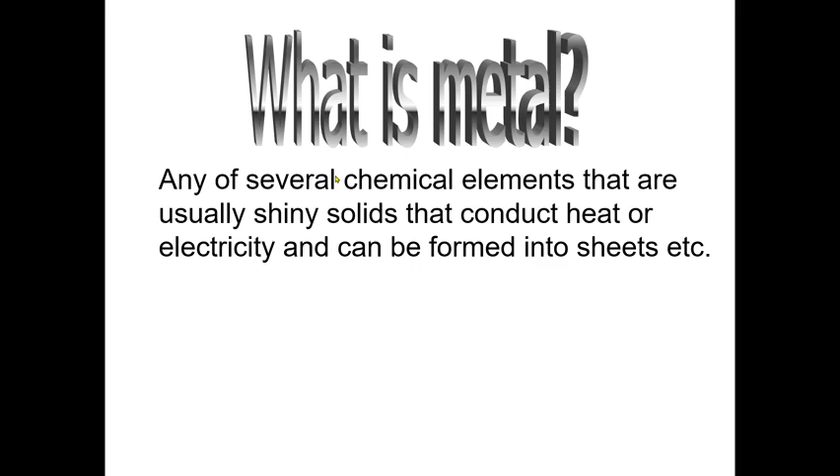Where do we use metal? Think about that. Well, quite possibly in every industry on the planet. I was challenged once, what about basket weaving? Well, most likely the tools that they use to cut down the plant materials to make the baskets are metal, and there's probably some other tools that they use which are metal. So it would be really hard to think of an industry that metal is not used.

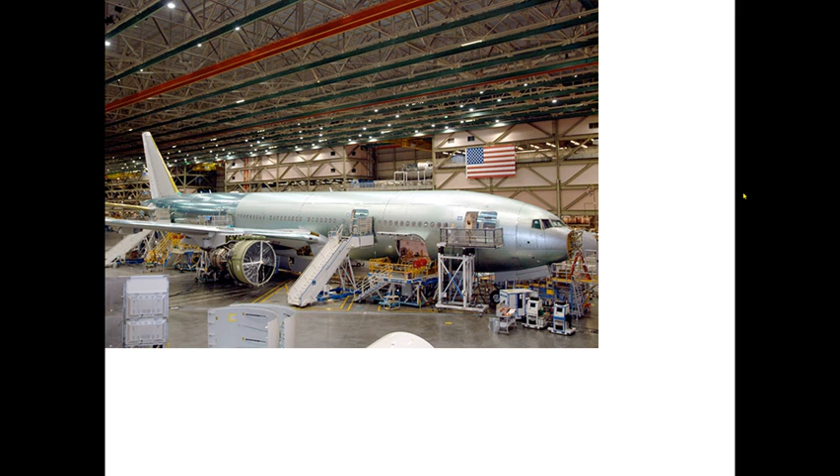Here is the aircraft or transportation industry. And this is aircraft aluminum, and aircraft aluminum is a mixture of aluminum and copper and a few other elements, which we'll discuss as we go on. The reason for aircraft aluminum is it's very strong and lightweight.

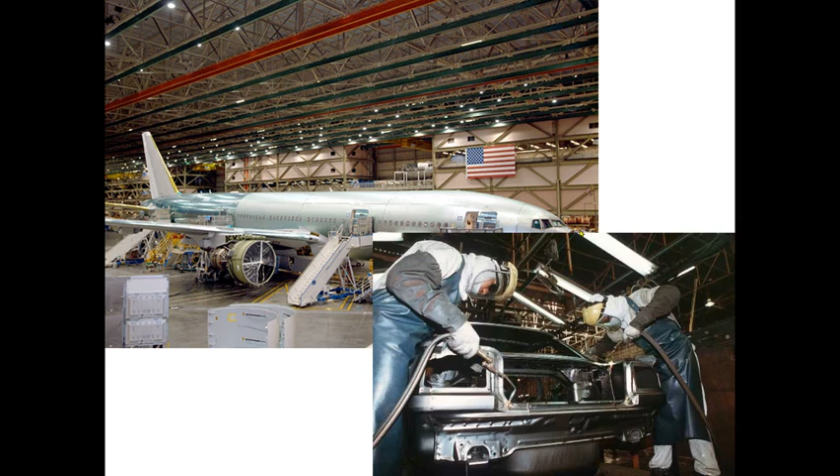Also in the transportation or the automobile industry, every car, I shouldn't say every car because I have seen some novelty wooden cars, but every car on the road that is manufactured has a lot of metal in it. Most of them, the body and the chassis are made out of steel. There are some high-speed racing cars or custom cars that have titanium bodies and maybe carbon fiber bodies, which is not a metal, but most of the structure of cars is made out of metal, usually steel.

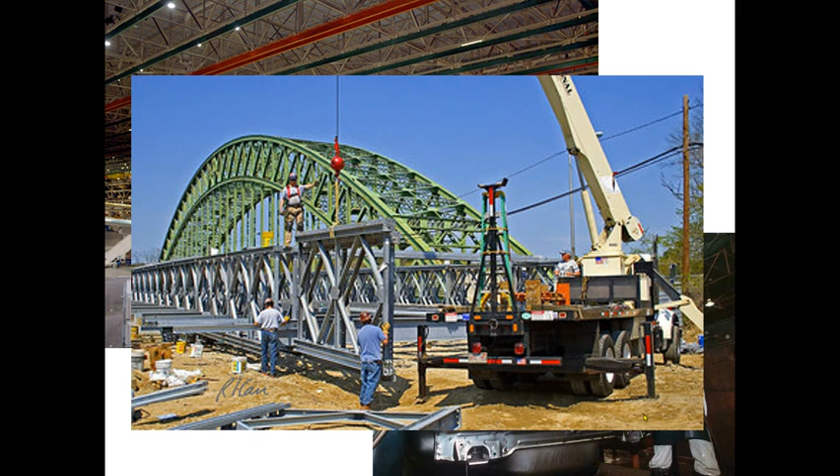Same with bridges and the civil engineering area. Bridges and construction use a lot of steel. Steel, I like to say, made America, and I'm not the first one to say that. Life would be completely different if we didn't have steel to make structures such as bridges.

Underneath the floor I'm standing on is concrete, and inside that concrete is steel reinforcement known as rebar. The window frames around the windows here at school have metal, and it's used in all sorts of areas of construction, not excluding nails and screws, which are made out of metal.

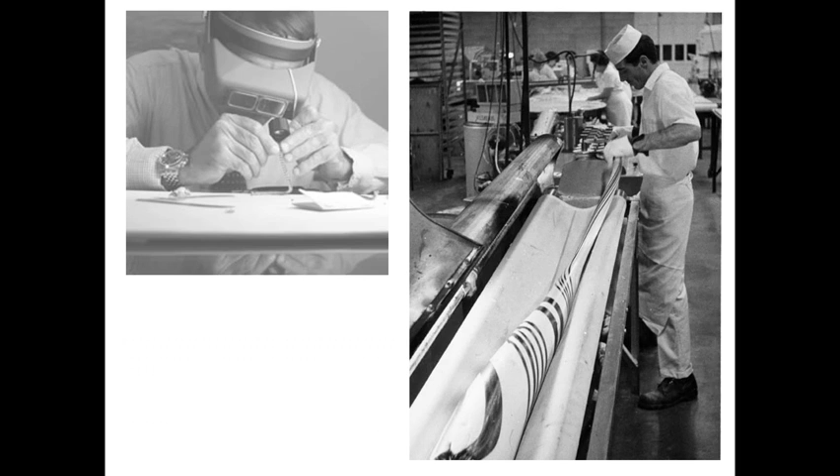On the left is precious metals, which is a jeweler. There are precious metals such as gold, silver, platinum, and really the most expensive part usually is the stone. If it's a diamond ring or a ruby necklace, we trust that metal to hold that stone in place, even though metals such as gold are very, very valuable and range around $1,500 an ounce for gold.

On the right is a candy factory, and it's kind of tough to see, but the food industry relies heavily on stainless steel. That's a type of steel that is non-corrosive and is easily cleaned and sanitized for making food. You may even have pots and pans in your kitchen or silverware that are stainless steel. If there isn't metal in it, metal is used to make it.

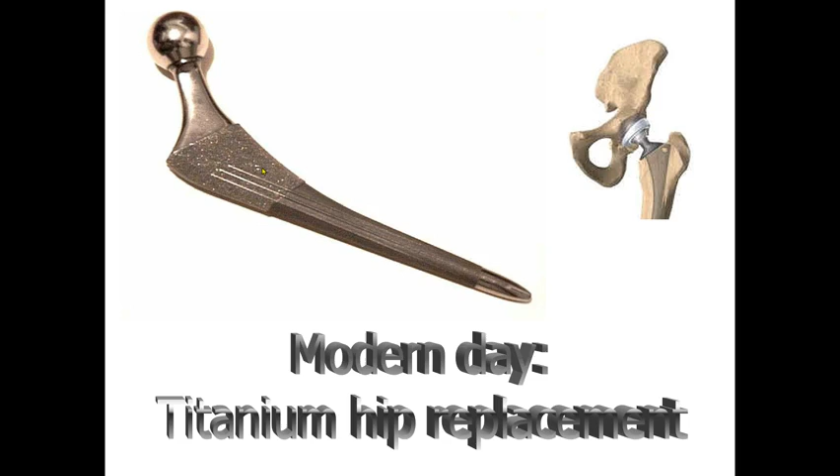Here is titanium and stainless steel to construct a replacement hip joint. This long part of the replacement hip gets literally hammered into the femur, and this being titanium is hypoallergenic, which means it does not react to the body. The stainless steel is non-corrosive and doesn't wear easily, so it is actually part of the joint. So this is a mixture of two different types of metal to replace hips.

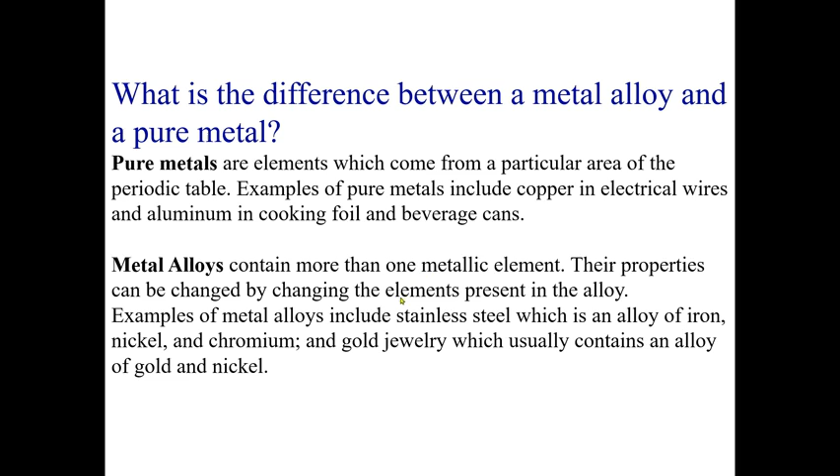So today we are still solving problems and figuring out ways to mix different metals from the periodic table to come up with new metals. And when we figure it out and do the calculation, there are thousands and thousands of metals.

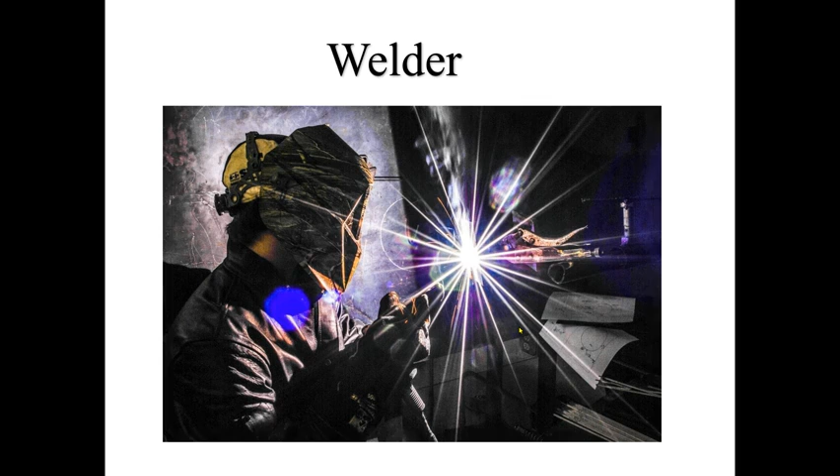What jobs deal with metal? Can you name any? I'm sure you can. Well, it's easy to think of welders. Welding is a very good occupation, requires a lot of hard work, steady hands, and lots of concentration. Some good training and getting some certification goes along with becoming a welder.

Welding happens underwater, welding happens on skyscrapers, welding happens on our oil and gas lines, welding happens on automobiles, and many, many, many other products.

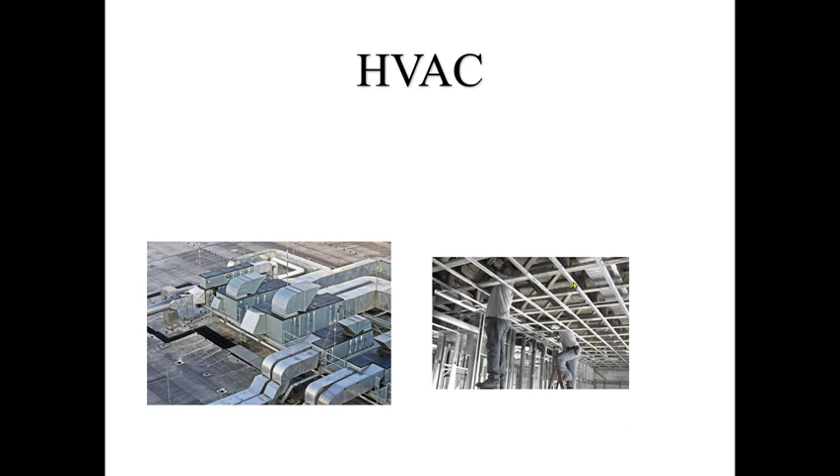HVAC, which stands for heating, ventilation, and air conditioning, is a very common form of metalworking. In your house or your apartment or your place of residence, there is metal ductwork that pushes air, or I should say allows air to travel through to different rooms and different spaces.

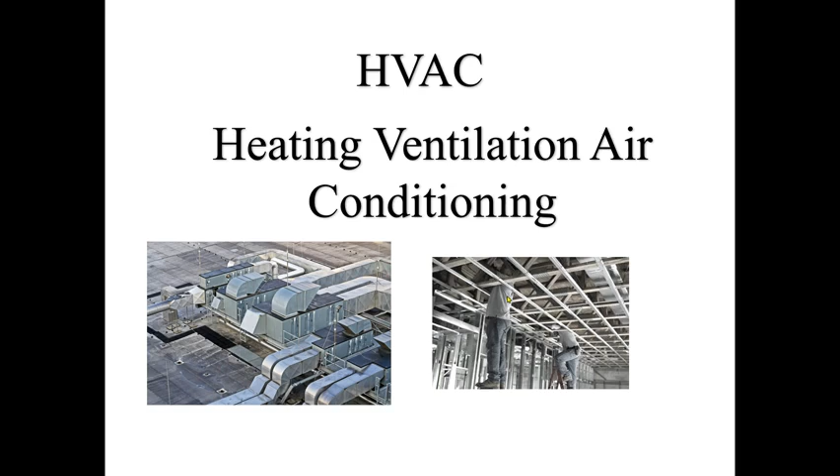So your furnace or your air conditioner is pushing that air through ductwork, and that is a skilled trade all of its own. You could easily become a professional heating, ventilation, and air conditioning installer and do that as a lifelong career.

Manufacturing, without question, uses lots of metal, all the way from the automobiles to the machines that do packaging or bottles to cutting out parts. This here is either a laser or a plasma torch, and here in our shop we have a plasma torch that will cut through metal, very similar to the way this one does.

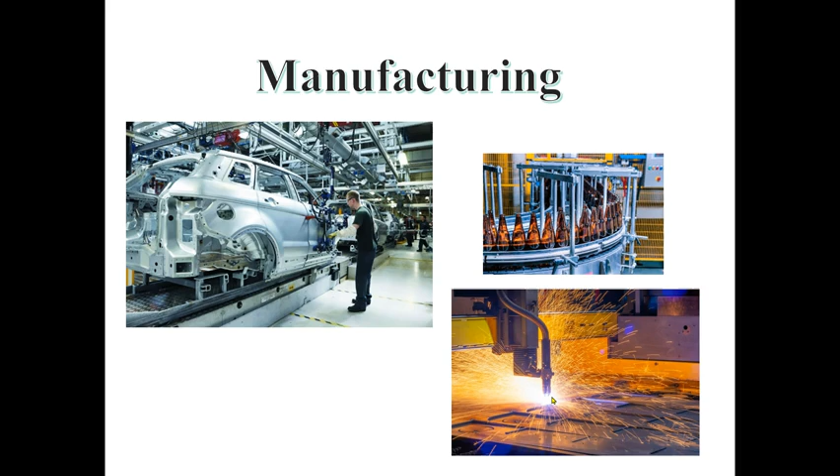Machinists are metal workers. In fact, look around your room or the space you are in right now and look at nearly any plastic object. I say nearly, and my guess would be over 99% of plastic objects are the result of a machinist that makes molds. And the mold is made out of steel usually, and with a steel mold, you can get in the neighborhood of 1 million plastic parts from that mold.

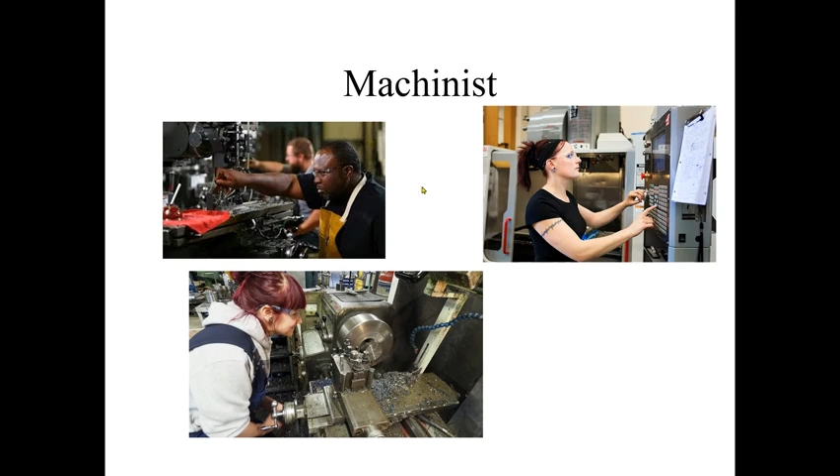If we made the mold a little lighter and easier to machine out of aluminum, an aluminum mold could get 100,000 plus or minus plastic parts. So the benefit from making a mold is once that mold is made, it is very rapid and very cost effective to inject plastic and make plastic parts because of the machinist or the tool maker who makes the metal mold.

Foundry is where metal is melted and poured into molds. Many things are done this way. Engine blocks and fire hydrants are a good example. If you have seen a fire hydrant, the surface looks a little bit rough and it's painted. So that is going to be a cast iron fire hydrant, and it's painted because it will rust if it's not painted. And then the parts that have threads for the caps and the screw fittings are machined after the fire hydrant, or for that matter, engine block, are poured.

There are many objects. Lots of the tools we have in our shop, including anvils and our milling machine bases, are poured from liquid steel in a foundry. Side note, that steel that is being poured there is close to 3,000 degrees Fahrenheit.

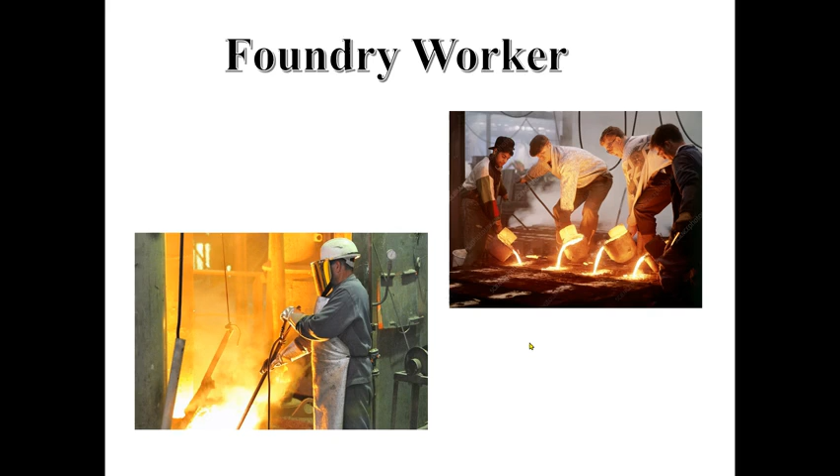Yet another occupation that uses metal is a surgeon. Surgeons will tell you that the experience you gain in a metal shop directly applies to the skills that they use performing surgery. They have to drill holes and use hammers and insert screws and read drawings such as this. In this case, a drawing may be an MRI or an X-ray, but they need the ability to understand what that three-dimensional space is like and know how to repair it.

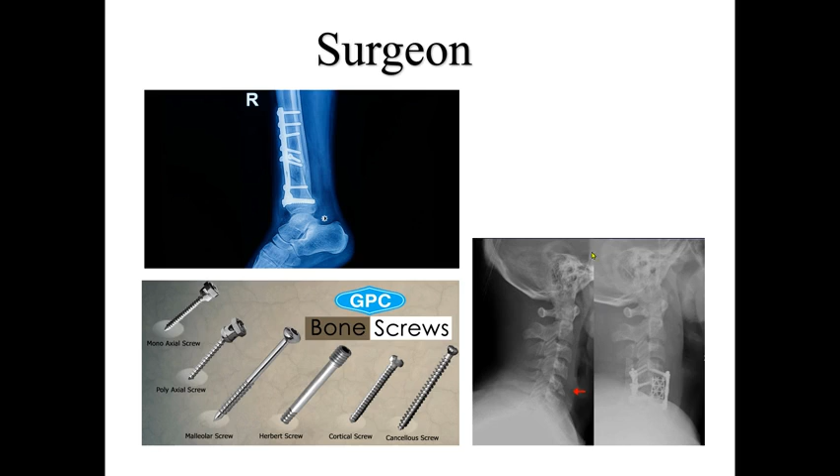Yes, a lot of education goes into being a surgeon, but you would certainly benefit by having experience in a metal shop if you are bound to be a surgeon someday.

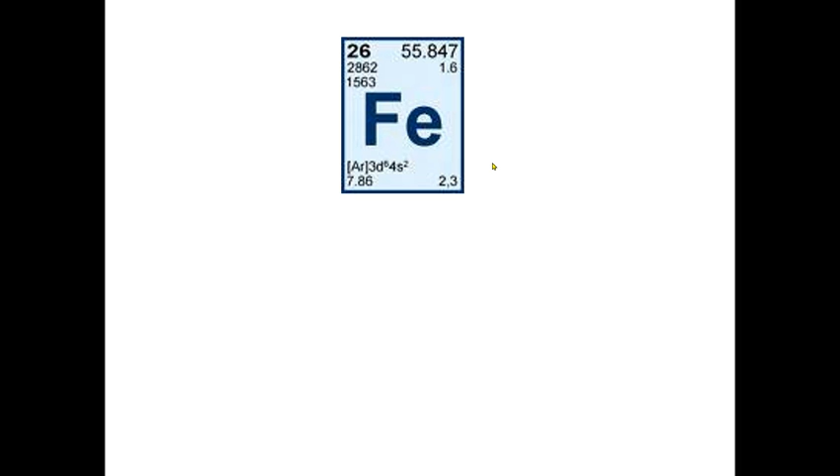Here we're starting to talk about the different types of metal specifically, and this is the periodic element iron, and Fe stands for ferrous. Ferrous means iron. Ferrous, not this guy. Metals which contain iron are ferrous. Ferrous is, I use the word backbone, but the ingredient in many different types of metals.

Metal or iron out of the ground is useful, but not nearly as useful as once it is mixed with other elements. Not this guy. Ferrous.

Cast iron has a white, grainy appearance when broken and can be very hard. White cast iron has a white appearance when broken. Kind of did those in reverse order. When white cast iron is broken, it has a white grainy appearance, and gray has a gray grainy appearance.

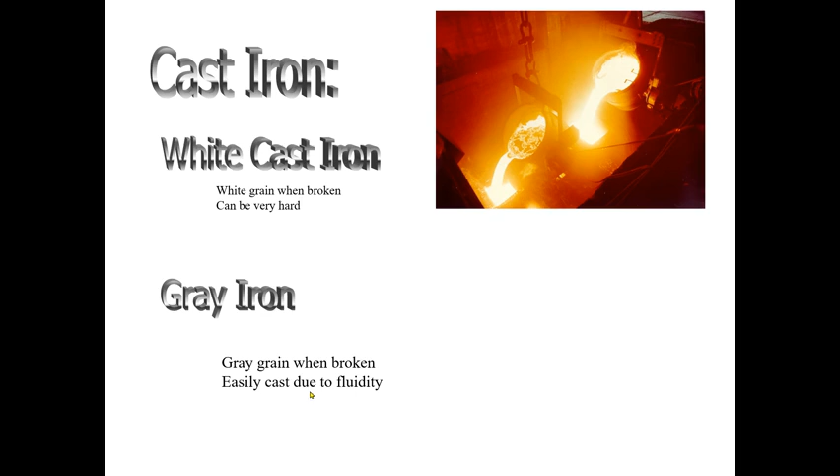White cast iron can be very hard and is used for making parts in machines such as pumps or engines that have a lot of wear, meaning there's a lot of contact with other surfaces and they might wear out quickly. Gray cast iron is easily cast. It's very fluid. As I mentioned earlier, fire hydrants are gray iron or gray cast iron.

Wrought iron might be the closest iron that we use on a common basis that is most like the iron from the earth that we extract. It's very inexpensive. It's very workable, and you see it often in things like decorative gating and whatnot.

Steel built America. Steel is not only iron, but a mixture of other elements. The steelmaking process is quite complicated, and it took quite a long time for us to figure out how to do it in a mass production method. In the past, the Japanese samurai sword makers figured this out thousands of years ago, but it's a slow, time-consuming process. All steel is ferrous. All steel contains iron.

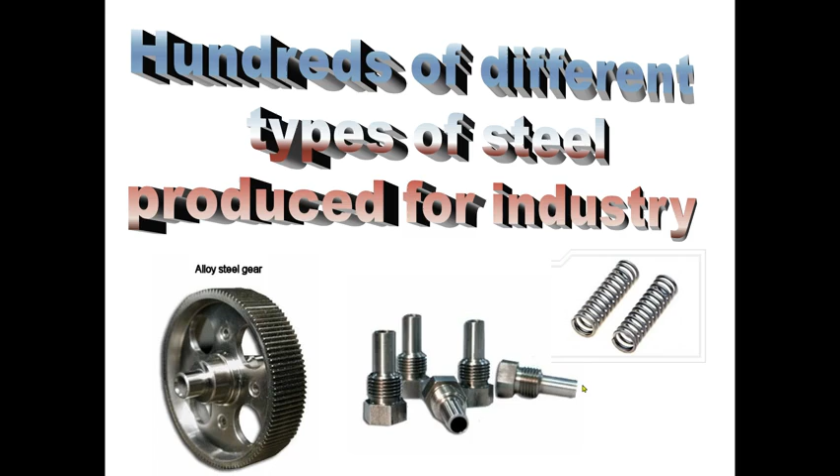A key part here is steel is between 0.05 and 2% carbon. The trick to that is in a Bessemer furnace or other methods, we take the iron and burn out all of the carbon, just get exactly pure iron, and then add exactly the amount of carbon that we want.

So low carbon steel, known as mild steel, which we will use in abundance in our shop, you may be familiar with that sound, contains from 0.1 to 0.3% carbon, and is produced in a Bessemer or open hearth electric process. These steels work easily, can be welded, and come in all different shapes. We get quite a bit of this through our shop, mostly because it's easy to work

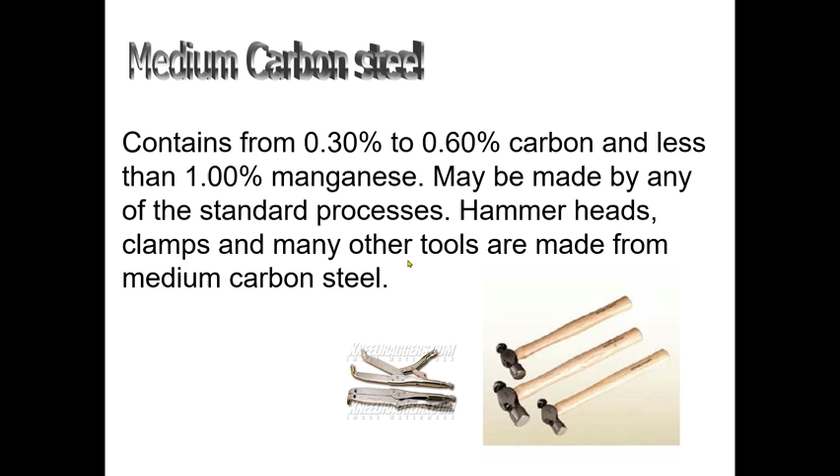and inexpensive. Medium carbon steel you'd find in tools such as pliers or hammers that are a little more expensive than low carbon steel, but contain 0.3 to 0.6% carbon. They're a little tougher. They will withstand the abuse that tools take more than low carbon steel.

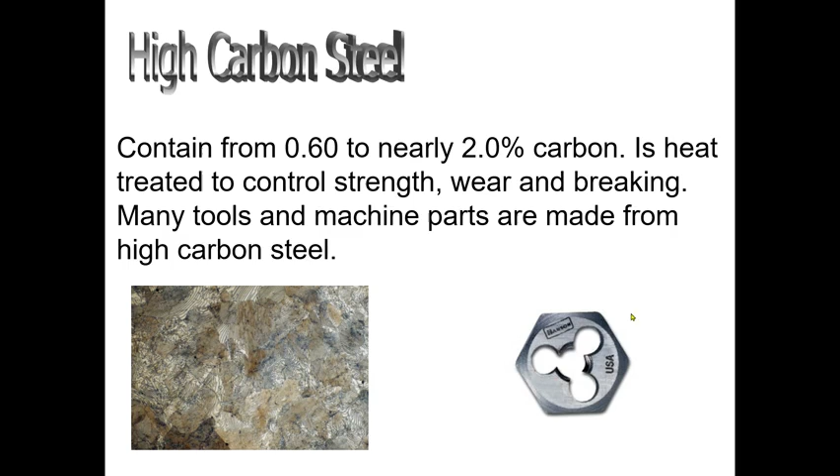And the ultimate here is high carbon steel. High carbon steel can be very expensive, and it has from 0.6 to 2% carbon. There are many levels of high carbon steel used for many, many tools, but when you get to high carbon steel, they quite frequently become steels that will cut other steels. This on the right is a die, which is used to cut threads into rod. So this will cut steel with steel.

A visual comparison: small amount of carbon overall, but just a little difference makes a big difference. High carbon steel is the bomb.

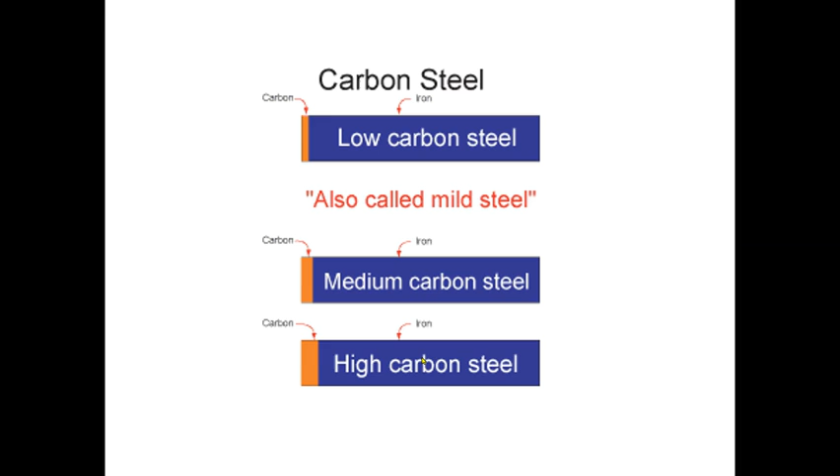Cold rolled gets pushed through in these machines that are extremely strong and powerful because it's not hot, and it work hardens the metal or the steel. If you've ever taken a piece of steel and bent it and then tried to bend it back, it's actually harder to bend it back than it was to bend it in the first place.

That's called work hardening. Same with blacksmiths who hammer on metal and jewelers who work with metal. The metal gets hard and more difficult to work the more it is worked. Cold rolling is the process.

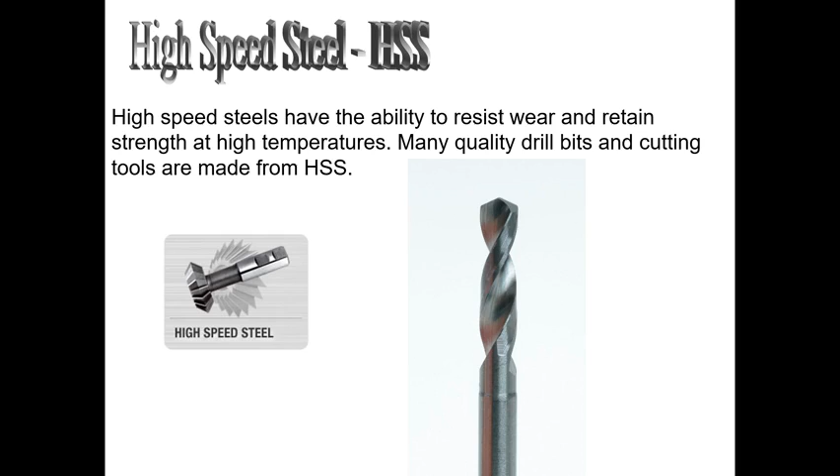Well, we need our tools to stay sharp at those high temperatures when it's getting hot. We certainly like to use fluids, cutting fluids or oils to... There we go. High-speed steels. Spring steels.

The process of making spring steel is really interesting. It is a heat treating process. So once... different springs are made differently, they may be heated up for a certain amount of time, we'll just say an hour, and then dipped in an oil, and then heated up again and dipped in water.

Every spring manufacturer has their own secrets on how to get the springs that will return to their springiness every time. So millions of times a spring will not lose its springiness. However, if that spring is heated up to a high temperature and then allowed to cool, all the springiness is gone.

That brings up a really interesting point about the whole process of manufacturing steel, that there are many ingredients on the periodic table that get mixed with iron to create a steel that suits the needs of the application it is to be used for.

So, for instance, stainless steel is very corrosion resistant, and it has a high percentage of chromium. These are highly resistant to acids, to even simply water and rusting, which is called oxidation. Stainless steels can be very expensive.

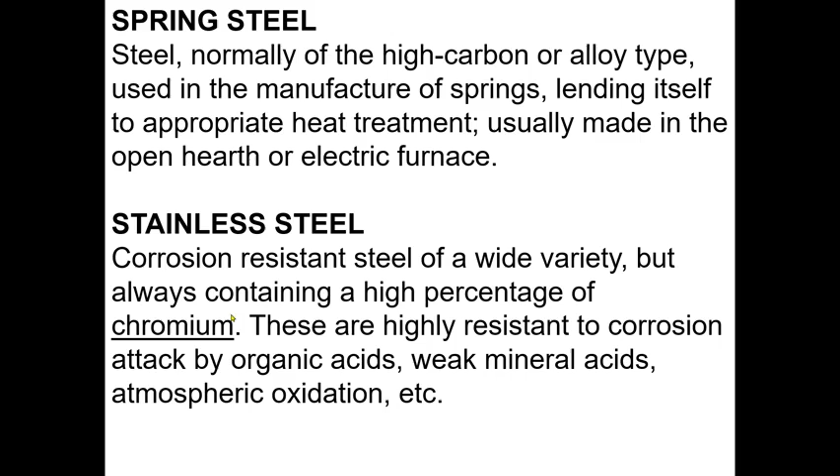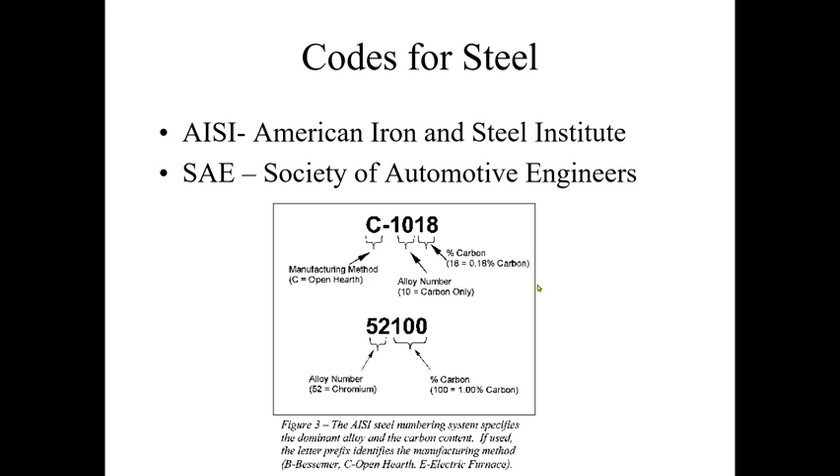It's a reason why we in the United States have very good quality products, because we hold ourselves to a high standard and we know what steel is being used, and in certain applications it cannot be a low quality steel for that application.

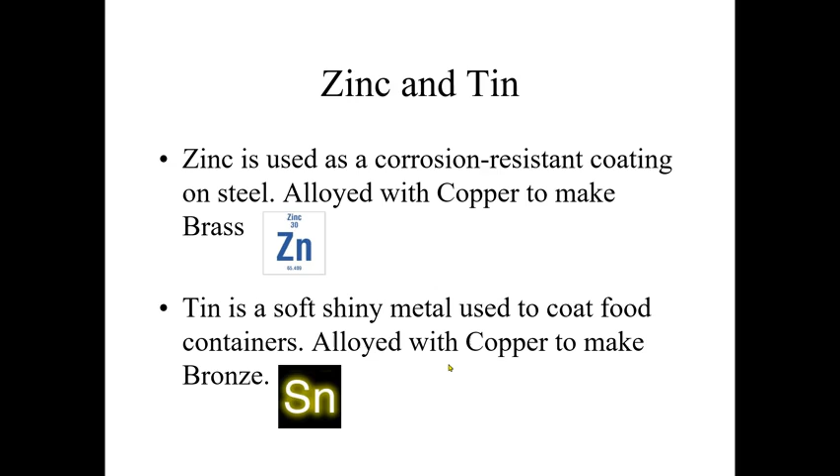Tin is a soft, shiny metal used in food containers, and mixed with copper makes bronze. Pewter, I wish I could hand you a piece of pewter right now because it simply feels soft. It's not soft to the point that you can squeeze it like a marshmallow, but it has kind of a soft sensation to the touch. It's used in small sculptures and kitchen utensils.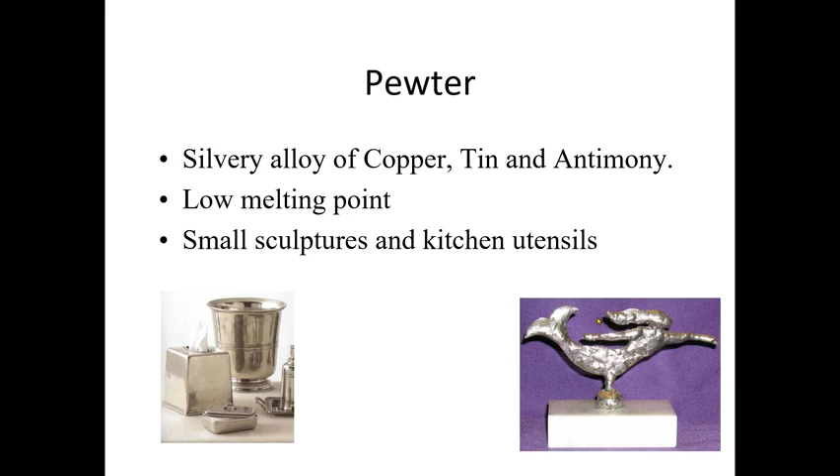The nice thing about pewter is it has a very low melting point, so it's been around a long time where people are able to make castings with pewter because of its low temperature.

Titanium is incredibly durable, strong, and fantastic for its strength-to-weight ratio. Many things are made of titanium, such as eyeglasses and racing components for cars, airplanes, bicycles, and anything that might have metal components on it. It is as strong as steel and as light as aluminum.

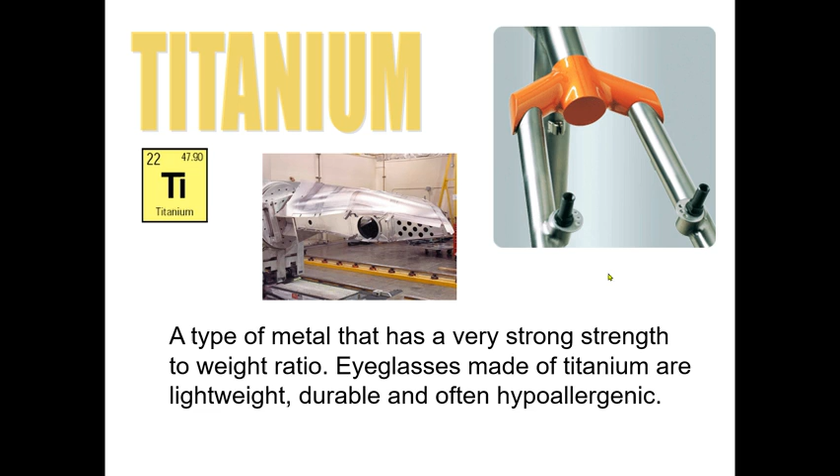An interesting story about titanium is that the SR-71 Blackbird is made from titanium, and it was designed and built to spy on Russia back in the Cold War. Well, most of the world's titanium exists in Russia, so we were getting our titanium from Russia and building SR-71 Blackbirds to spy on them.

Aluminum, to us, seems like: is it worth it to throw it away, or do I walk an extra 3 steps to the recycle bin? Well, aluminum has not always been that way. It is one of the most abundant metals on the planet, and when it's mixed with things like copper, silicon, and manganese, it becomes very, very strong, such as the aircraft and structural alloys we've talked about.

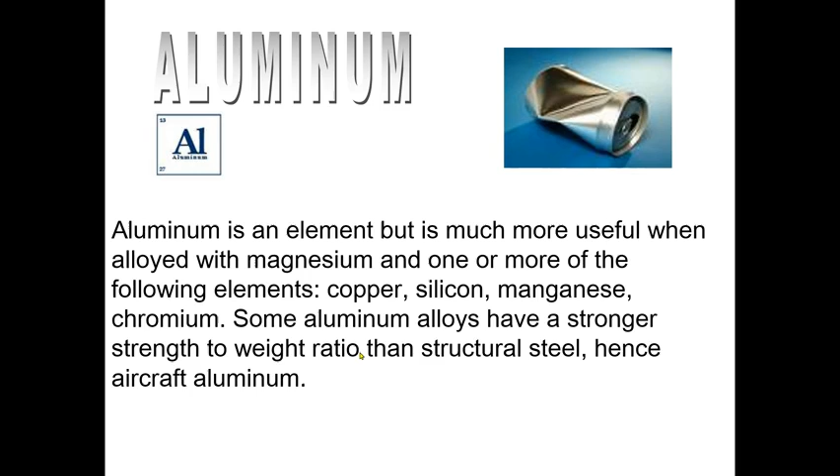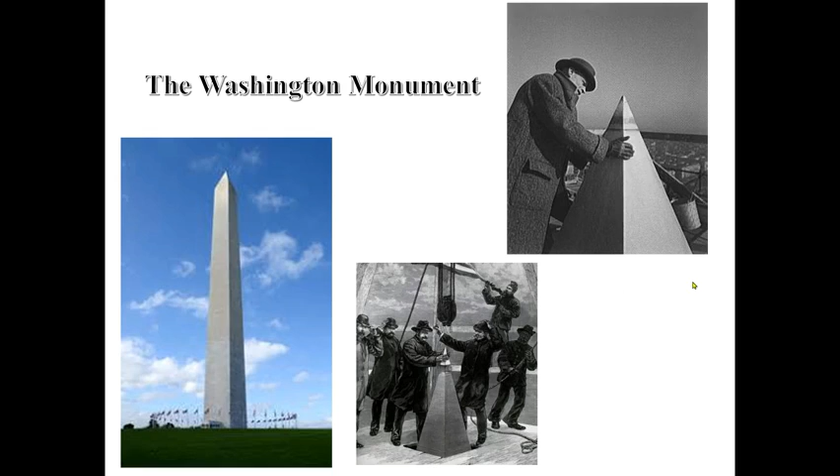Not all that long ago, aluminum was very hard to extract from the earth. So back when they built the Washington Monument, they wanted to cap it with the most valuable metal on the planet at that time, and at that time, it was aluminum. So to this day, the top of the Washington Monument is capped with aluminum, and I'm sure that value has dropped dramatically. It all goes back to the company Alcoa, Aluminum Company of America, that figured out how to take essentially dirt and extract the aluminum from the earth at a cheap cost. Before then, it was very valuable.

Here are 2 interesting ones, tungsten and tungsten carbide. Tungsten is mixed with steel to make tools very hard. Tungsten is an element. Tungsten carbide is an alloy, a mixture of more than just tungsten. And this is one of the hardest materials, the hardest man-made material, almost as hard as diamonds.

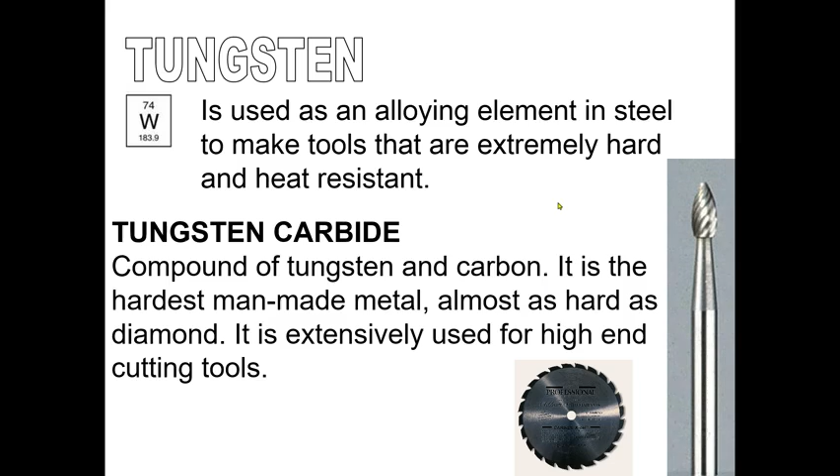Tungsten itself and tungsten carbide are used on tools, and the tips of these saw blades and this little cutter can be tungsten, and they withstand lots and lots of heat and abuse, and can cut through things such as metal.

A very common use for tungsten, which we're seeing less and less of these days, is the light bulb. The glowing element in this light bulb is a thin wire of tungsten, and what happens is we pass electrical current through both sides of that wire, and it heats up so hot that it glows. It's in a vacuum, hence the glass bulb, and because of that metal being so hot and glowing, it produces light.

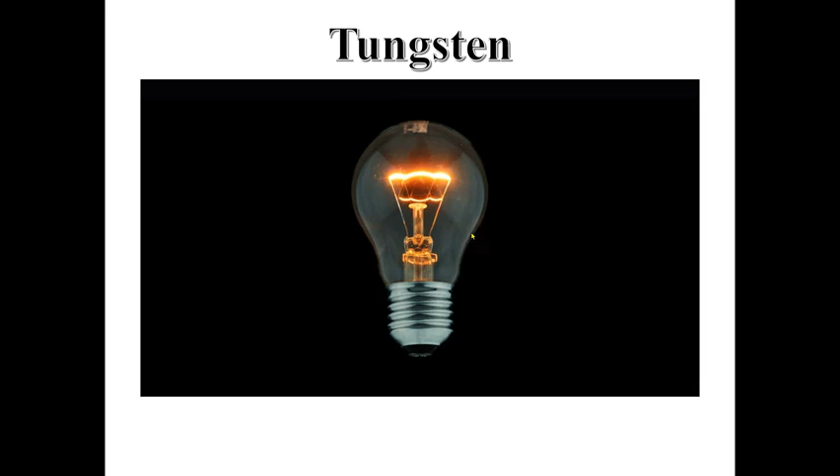Until recently, that was one of the main methods of lighting homes, but we have come up with other things such as compact fluorescent light bulbs and LEDs. However, this little piece of metal in there is tungsten, and it has a very, very high melting point, hence why it was used in light bulbs.

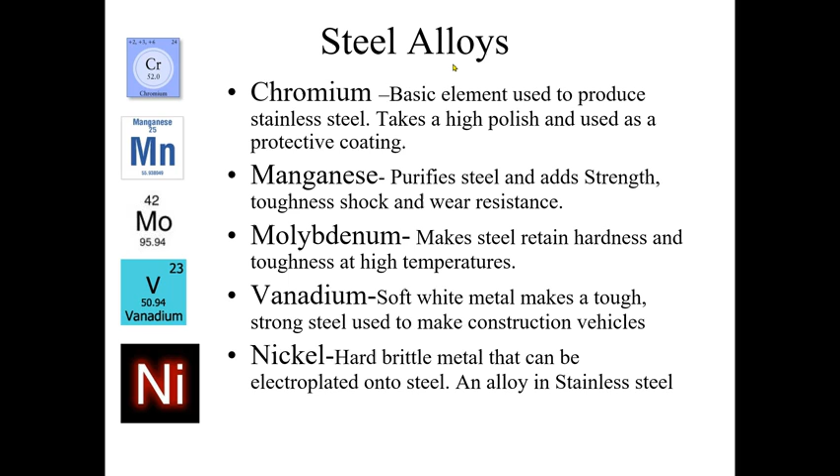Here are a bunch more elements that are used in steel to make steel better or more useful for its purpose. I will let you peruse that, and you can pause on this slide if you need. At a later point, we will talk about heat treating of metals. And that concludes this episode of Classifying Metals.